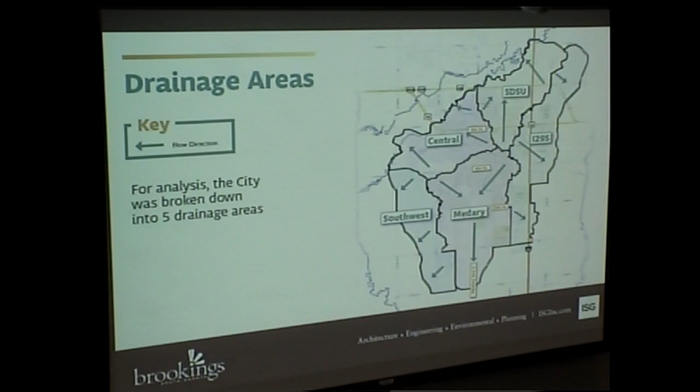Moving into existing conditions: what you'll see here are the boundaries of what was evaluated in this plan. As shared, Six Mile Creek and its impacts were not included in this study. With these 5 drainage areas you'll see here, the arrows denote the flow path and direction of that runoff and where the storm makes its way towards some of those receiving water bodies.

I'm going to take a moment to introduce a little bit of the symbolism on this page. So to begin, this is the SDSU drainage area. What we have modeled and what you'll see here for results are for a 100-year storm event, so a major storm. In this case, it's 5.7 inches of precipitation in 24 hours.

What that results in, you'll see that light blue shading of where that ponding or flooding takes place within the drainage area. And then the bright green are the existing storm pipes or existing infrastructure that is able to convey some of that surface water through that pipe or channel downstream.

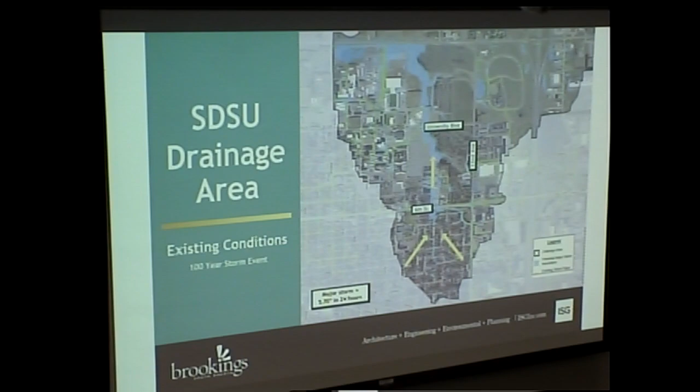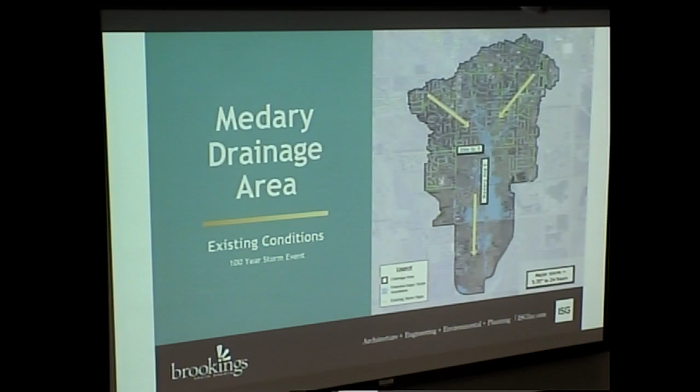I'm going to go through two more here. For the Medary drainage area, you'll see here similarly in that major event where that ponding and inundation takes place. And then finally, for the central drainage area, you can see as that moves towards the west where that ponding is taking place.

The other two drainage areas I showed in the first slide are not included as we are moving forward, because there were not major concerns or major improvements recommended in those areas as have been included for the three that I've shared with you here.

So backing up, as we talked through the analysis that we've done, this is all a simulated event as we look at where does the water go, where do we see it. What we do with that analysis from there, that's what I'm going to walk through next.

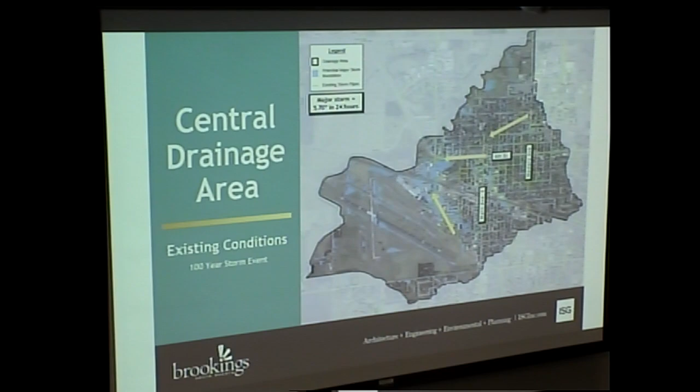The information that we gathered through community engagement, through events, as well as committee meetings had representatives from the city, from SDSU, from BMU officials, and community representatives. We also gathered feedback through an online survey, and we'll share some of those results later in the presentation.

I think this is a really important piece of the puzzle to share with you: it's important to us that what we use the model for, or what we use those results for, is reflective of the values of the community that it's intended to serve. So through our community engagement, that's what we were seeking and that's what we received.

To highlight this, let's consider two projects that are otherwise similar, but one of them provides an improvement for citizen safety, and one provides an improvement for reduced maintenance. While both of those are categories we want to evaluate, we want the one that really protects citizen safety to be of a higher priority. So in that way, that's how we've used the weights to score the final importance of each of these categories differently.

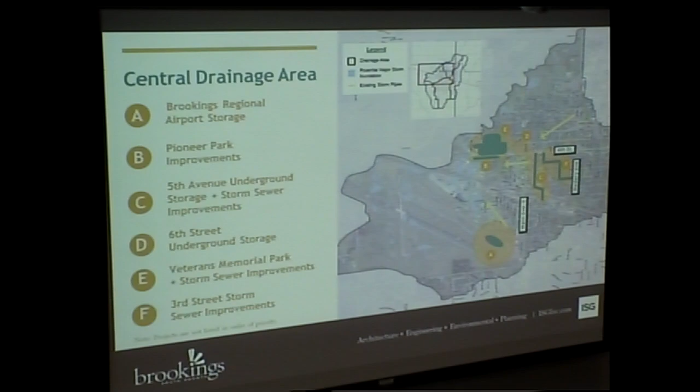So as described, we used the model to identify the problem areas, and used feedback from the community to evaluate how to grade the performance or priority of these projects. From that, we were able to rank all of those projects, and we ended up with $45 million worth of projects identified in this plan.

With that priority, we looked at a 10-year time frame: coming up next, which are the highest priority? Through this process, we're attempting to make sure we've right-sized the program. I'll talk about fees and financing, but I want to note those things need to be in concert — if it's the wish to be more aggressive and address more projects rapidly, the financing and rate increase would also need to match that.

This is what we've outlined and projected for the next 10 years: $12 million worth of projects. The projects included in this 10-year timeline range in cost from $380,000 to $4.7 million. Here's a quick overview of two of the highest ranking projects.

The Village Square Conveyance and Storage Project provides storage between University and 8th Street so we can increase conveyance in the Village Square area to reduce flooding. At 20th Street and Medary, providing storage near the soccer fields allows us to increase conveyance upstream and prevent ponding on Medary and on 20th Street.

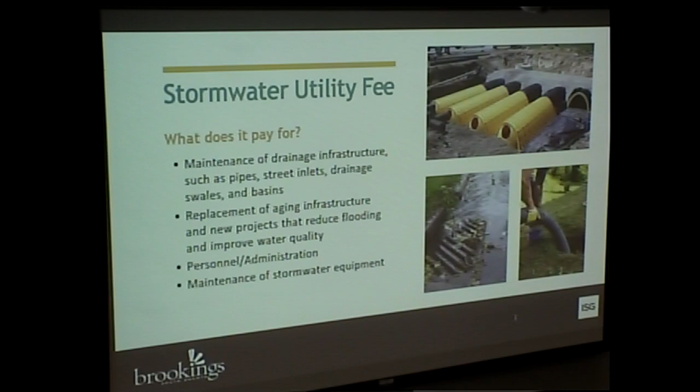The stormwater utility fee also pays for personnel, administration, and maintenance of that stormwater equipment. So I want to talk a bit about what this plan recommends going forward, specifically the equivalent residential unit.

This is really based on a philosophy to pay for what you use. So this fee is based on impervious square footage. We collected this information with infrared technology that allows for that to be calculated, as well as revisited as land use changes occur in the future.

We really do feel this is an equitable process to equate that fee with the greater imperviousness. So what you are using is what you are paying for, as the rest of the city is responsible for the infrastructure that receives the runoff from those properties. That is the relationship we're trying to make sure we are matching with the structure for this fee.

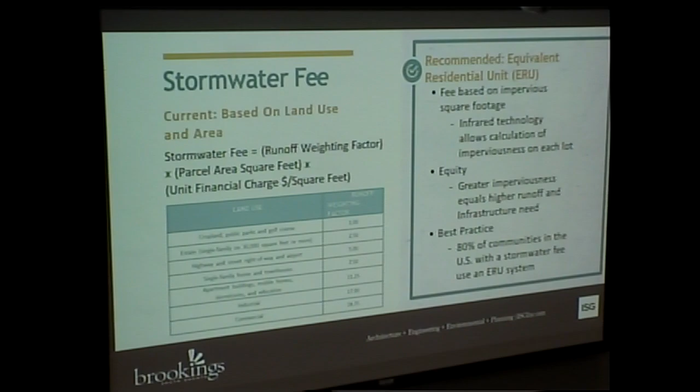This is a best practice. 80% of communities in the US with a stormwater fee use an equivalent residential unit system, as we're proposing here.

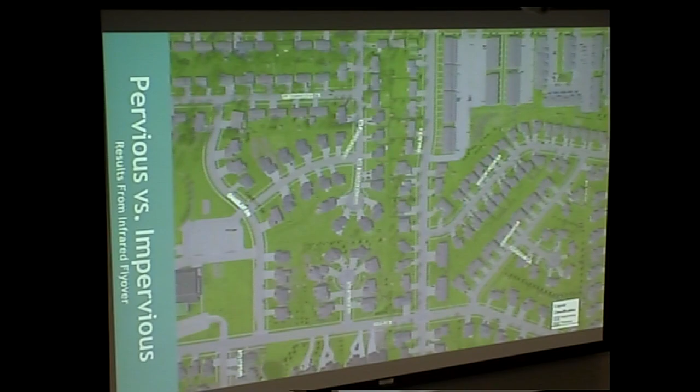But this is a very direct way to calculate those values and therefore have the runoff calculations based off of this information. So I want to highlight what that looks like as far as our previous rate structure, what that means.

I'm going to introduce you to two parcels here and talk about the way the fees have impacted them. On the left, we have a large parcel, 50 acres, and it's 25% impervious. So as you look at that, there's a lot of green space. We want to see how much water should be equivalent to how much gray we see there.

On the right-hand side, it's a much smaller parcel, but it's nearly 95% impervious. So that comparison of how much green to gray, you'll see between them.

However, on the left-hand side, the current annual bill for that property is $23,604, whereas on the right-hand side of the screen, that bill is $6,723. I'd like to point out that the total impervious acreage is 13 acres on the left and 12 acres on the right. So pretty equivalent in that, but the fee representative of how much runoff, or rather what the city is then responsible for receiving and managing within their infrastructure, is very different.

So within the city of Brookings, the way this ERU will be used, we were able to calculate with the average single-family residential property how much runoff they generate. We found the square footage for that based off of that flyover imagery you were able to see. So all single-family residential properties are going to pay that one ERU value. Those are all consistent.

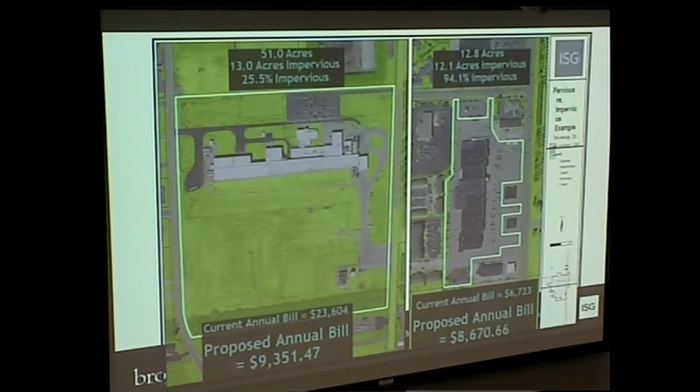All right, moving on to water quality. This is a highlight from the online survey that we received. The question that was posed is: how important is it to install practices such as green infrastructure, native habitat, and greenway corridors that enhance flood resiliency while also improving water quality, recreation, and quality of life? With that, we asked for 1 being most important and 5 being least important. We asked the community, how do you feel about this? How important is it to you?

75% of respondents scored this a 1, 2, or a 3. So pretty clear evidence of this being a highly valued piece of feedback for us to incorporate throughout our plan, of wanting to include green infrastructure that improves water quality, recreation, and quality of life.

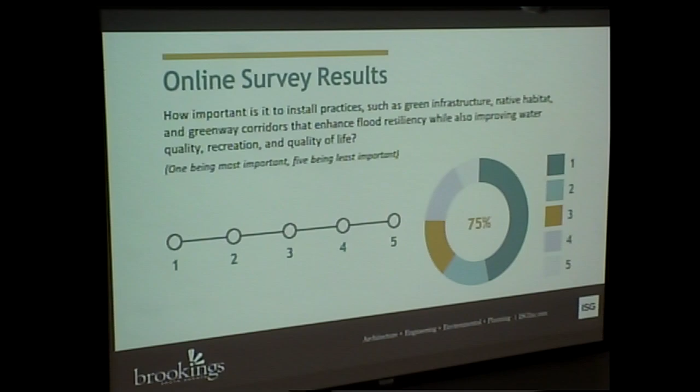A few of the recommendations that we've included of how to do that: there's certainly throughout the projects that we've talked about within that prioritized list components of that in public spaces, but there's also opportunity for this to be encouraged or increased on residential private property. So the recommendation is to establish a reimbursement program, with an example being the City of Des Moines, which reimburses 50% of a property owner's cost with a cost limit on how big the investment could be. So up to $2,000, they'll pay 50% of that.

We also recommend that, to start, this be a focused program. I think that really allows for a lot of neighbor-to-neighbor conversation and storytelling that helps with adoption, being able to ask, hey, what's that? And I think that for some of these private properties, that's a really helpful tool. So keeping our scope focused with these two proposed styles of projects, rain barrels and native plantings, I think that's helpful in this early stage of a program, certainly with the potential to expand into the future with other opportunities for different styles of practices in those private spaces.

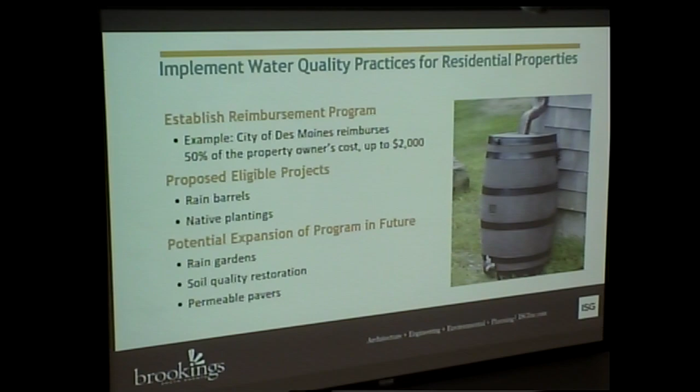I'd like to share next two development standards and then the inspection procedures that are also included in the plan. The first, as we think about new development or new infrastructure going into the ground, one of the things we want to address is our opportunity for improved operation and maintenance that maintains the longevity and vitality of the infrastructure over time, as well as what that impact for water quality would mean if we include a requirement for this forebay.

As you'll see in the image on the left there, this is intended to be the first receiving space for runoff as it gets there. It allows for some of that pollutant to settle out before moving on further downstream. Having this isolated space allows for improved operation and maintenance, to keep dredging or otherwise activities of clearing out some of those pollutants or sediments compiled in that area to a smaller geographic space for ease of machinery or shovel, or however large the forebay may be. This is a really important interception point to allow for that water quality improvement to take place in that space.

The second standard I'd like to talk about is the groundwater freeboard. In these detention areas, the first image on top shows a dry basin, as well as what that looks like when there is a storm event that fills it in.

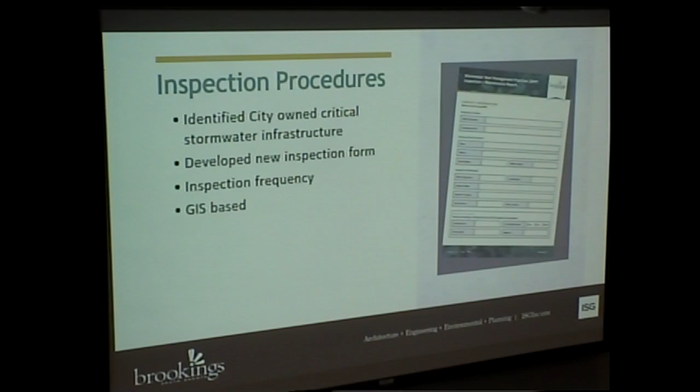All right, here's our summary. This plan is a guiding document for future stormwater improvements as well as the development standards we just talked about. It improves resiliency against flood risk, provides recommendations to accelerate practices that improve water quality, including some on residential private property, and improves the sustainability and protection of our watersheds.

Additionally, outside of the rest of how water is behaving, we have also included some recommendations on how to finance this program, to make sure that these recommendations for projects have some layered-in support for how we get that done.

So balancing the financing with the ERU, we have improved the equity in that calculation of the way we are collecting that fee, and we have projected that out for how we plan for the next 10 years and the funding needed to address those highest priority projects.

The next steps are to compile our final report, present that report to the public and to the City Council in the coming year, after the new year, as well as have the ERU fee ordinance go through its first and second readings, anticipated by the end of the first quarter of the coming year. I would love to answer any questions you have.

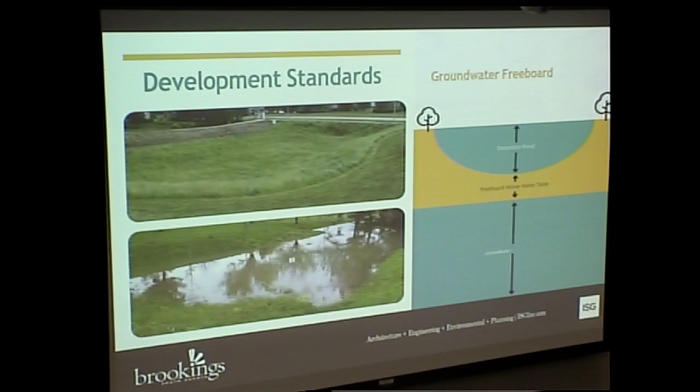I think there's been some unrealistic expectations of detention basins in the past where there's standing water in these ponds, and it creates a hazard. We're all familiar with hazards with detention basins. This would help prevent that from occurring.

There is a time and place for water to be in detention basins. We can establish wetlands that may provide water quality, but those need to be designed, and unfortunately, the way the design standards are right now, they're not designed that way. So we need to forward-think and see what we want to get out of these detention basins. I think you could add that the new calculation of the ERU, when adding the overall cost of the project, also adds the overall cost of operations.

So the increased operations is calculated into that offset of the ERU. But Charlie's exactly right, the expectations of what that maintenance looks like is going to be different, especially as we look at different plantings that could help offset the cleanliness of the water. So looking at quality is my assumption. Yeah, and as part of that cash flow, we've included additional funds for maintaining our infrastructure.

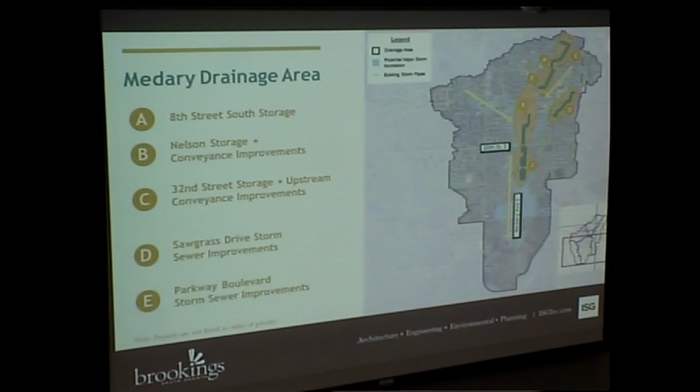Is there any recommendation on what could be done to help get the water out of that area that's being blocked by roadways? Are you allowed to make actual culverts, like the university one? That's a good example, up on the north side there, the bypass on 14, where all the water's backing up to the left.

If it goes on the other side, you're not going to have that much retention, or do you end up with conflicts with property owners on that side of the road? What's the issue with this, and is there any solution to that?

There are solutions to that, and that's building additional infrastructure as to where it's inundating right now. I believe SDSU has a couple projects for this area that will help mitigate some of the inundation, the external inundation where it's rolling over their retention ponds right now.

It's expanding past those. So it kind of brings into another question of future roads and designing them in a way that they're not blocking the flow of stormwater. And is that addressed at all?

That will be addressed in the development standards and the engineering standards that we have. As you build additional roads, you'll have to have that conveyance and runoff modeling for how that road is going to affect this area for flooding. So that is being modeled now.

Yep. Back before 2006, before we had our developmental standards, it wasn't well modeled. Now we require stormwater modeling for any runoff generated by a site. And with that, we know where the water's gonna go, or where it was supposed to go. We know existing patterns and proposed patterns, and we're able to better design our infrastructure to convey and store that.

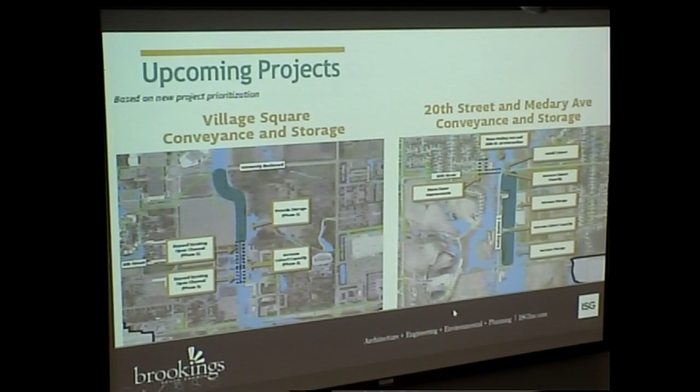Councilmember Avery: I was looking at the slide with projects. At first I thought the $12 million worth of projects in the next 10 years conflicted with the next sentence saying 10-year project construction costs range from $380,000 to 4.7 million. After you explained it, I understood these are individual projects in the second line and total projects in the first line. Then there's the $45 million in projects identified in the plan, but we only have $12 million, so people might say you're $33 million in the hole already.

You're spending money you don't even have. So is it a good idea to show a huge deficit like that when we really aren't intending to do $45 million worth of projects?

Well, we do have $45 million worth of projects. Back in 2008, when the plan was updated, they had 31 million and were able to finish some of these. This is just a long-term plan. We have 45 million identified, and each year we'll do what we can financially. We're only really going to look at it 10 years at a time.

Because even after year 5, you're kind of looking at that magic 8 ball—have we really done everything right? It will change a little bit. But identifying all the plans is really good to have, because it helps justify what the ERU is. There's a need to increase the ERU because we have all these projects identified that'll increase the quality of life for the community.

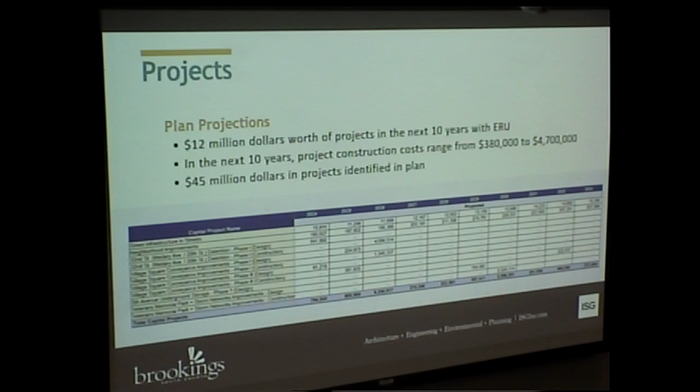Any other questions? Councilmember Estherson: Could you talk a little about how you identified the projects, before running it through the prioritization and calculations? How do you know exactly what areas need fixing?

I'll let ISG address that, but it comes back to this slide—if I can find it again. Where is that—keep going down. I'm losing it now. Yeah, oh, right there. So first, when they do the flyover, they really model where the inundation areas are. That's how they can see the areas, and then Adrian, do you guys want to comment?

Yeah, on that—the strategy is really first looking at existing conditions, where it's flooding, and then following these steps. Providing storage where it's flooding, and providing storage upstream of where it's flooding, was our first goal. That was possible in some areas, not possible in others. Getting water out of the flooding areas more quickly is another approach, so there are projects that do that.

And then providing storage downstream coupled with those conveyance projects. There are a couple of projects carried over from the previous plan that help improve areas where storm sewers are in poor condition or just need to be increased in size.

I'd also like to add that the modeling tool we've invested in lets us iterate through proposed projects, so we can see the impact and really dial it in so our recommended projects provide the greatest benefit for that area. We actually modeled some projects that aren't in the plan because there wasn't enough benefit, so we didn't include them.

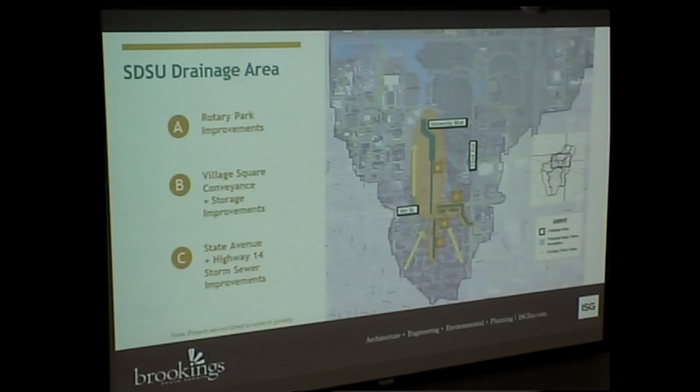Great question. One of the great benefits of having a defined prioritization process is there is a trail of how a project scored, so we can see the how and the why it is at the top of the list or wherever it may be. You can see the full boundary of where we have modeled, so anything within that footprint has been evaluated on the same scale. As far as specific areas of interest, that was not represented in our prioritization process or categories.

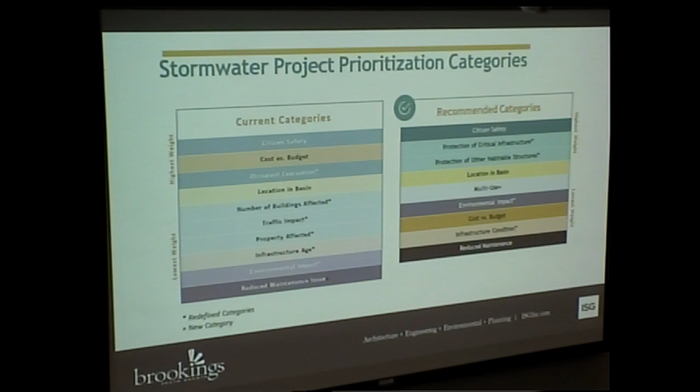And then second question, can you remind me with the potential reimbursement programs, is the ideal timeline to also launch that in 2025 with the rate increase if we adopted this plan, or would that come later? Ideally, yes, we'd love to launch it the same time. We just want it to be fully baked, so customer outreach and education so everyone understands what these programs are and gets the excitement going. But ideally, yes, we'd love to start that off at the same time as this.

Thank you. Any other questions, comments? Thank you very much. Thank you, guys. I hope the public is going to watch this so that they understand what we're up against.

I would just comment on the next steps. Just to remind council and the public watching at home, staff will bring forward the final plan, which will be given to the council and the public in a similar presentation. Then implementation of the ERU, which will be a further conversation, notifying those individuals of the change in the financing, implementing that, then moving and progressing forward to the program and implementation of it, which will be many years into the future. This is just the small amount of work in the beginning. Now after we get the plan put together and start implementing it, that's where all the work will come in from. Thank you, guys.

Thank you. Oh my God, it's Thanksgiving. We'll clap for you too.

All right, let's move on to item number 6, Interstate 29 corridor. Mike Struck, our Community Development Director, will present this item.

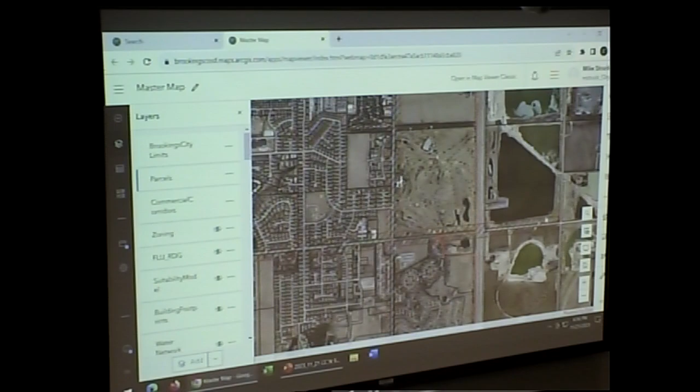The other thing I'm going to show is the commercial corridor overlay district. A little hard to see, but that's the hatched lines, and that would apply on 20th Street South as well as 6th Street up in these areas. So that's something that's probably 2, maybe 2.5 years old. We've been seeing a number of projects come forward on the southern end of the community along 20th Street South. It's an additional design review overlay district, so we put that in place to implement certain standards to try and align more with your priorities.

Any questions on some of the zoning side of things? All right, I'll jump back to this.